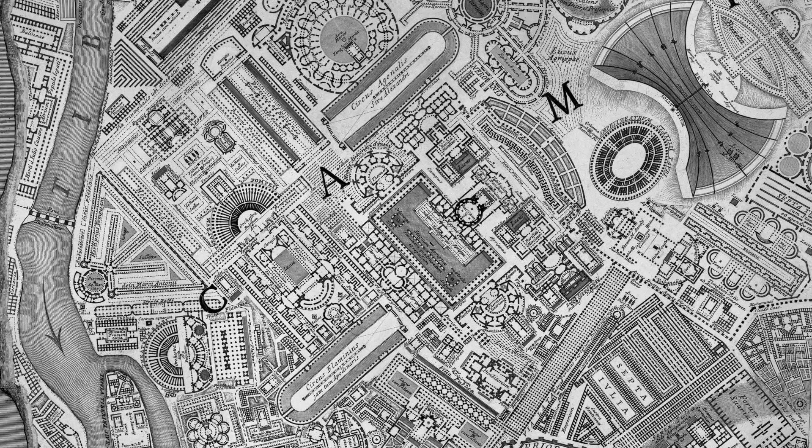The theme of this video is the structural grid, an omnipresent element in 20th century architecture that became synonymous with structure. As on other occasions on this channel, there is no intention to exhaust the subject, which would be impossible anyway. The idea is to draw attention to some aspects of the topic that may deserve deeper reflection.

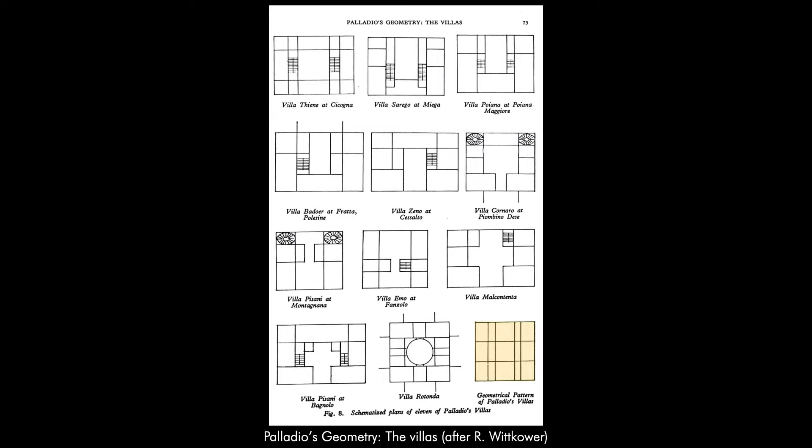The grid can already be found in various forms in previous centuries. Two-dimensional grids are present in Palladio's villas, as Wittkower showed us, on the facades of Renaissance palaces, and as the graphic support on which to place architectural elements introduced in Durand's teaching.

These first examples are important here because they illustrate what is not the subject of this video: the two-dimensional grid, a subject already dealt with by other authors.

The central theme here is the structural grid made up of pillars, beams, and slabs, a three-dimensional element that transcends its technical commitment and decisively participates in the expression of architecture.

The interest in this system lies in its potential for formal construction. Grids of this type convey a notion of measurement to buildings, as each module represents a floor, and thus the whole conveys information about the absolute size of the object.

Structural grids have the potential to give unity to a building and serve as a reference for three-dimensional explorations of facade elements, as in the cases of Terragni and Kahn, which we will see ahead.

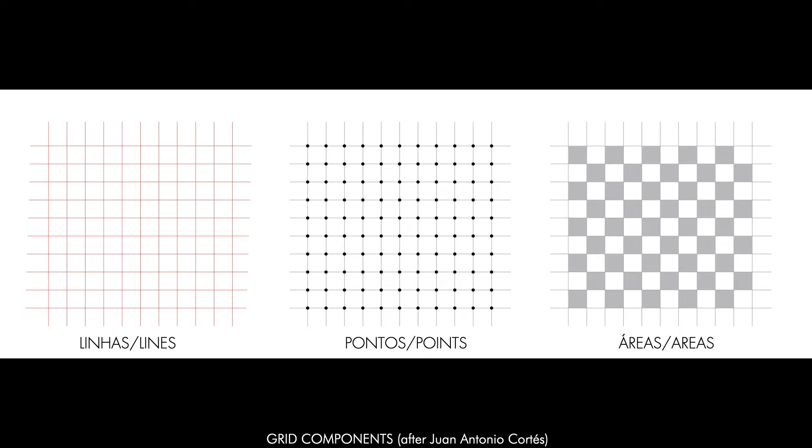When lines predominate, we are generally faced with large-scale projects, in which lines become corridors, buildings, or even streets. There are well-known historical examples, such as Berlin's Free University by Candilis, Josic, and Woods, or the unbuilt Venice Hospital project by Le Corbusier.

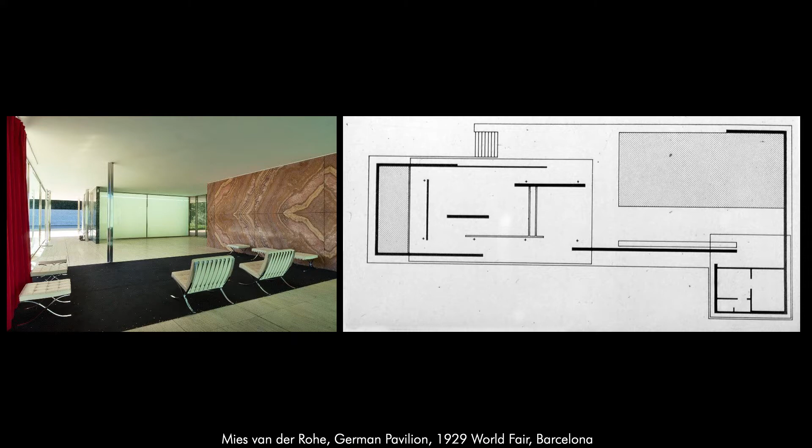The predominance of the grid dots, the columns, is very clear in the free plans of Le Corbusier and in what Mies van der Rohe produced before moving to the United States.

However, considering the grid in the sense I want to discuss here, in the work of these two architects it is incomplete, as only two of its elements are visible, the pillars and the slabs. In other words, the grid is flat, having only material entity as a resistant structure.

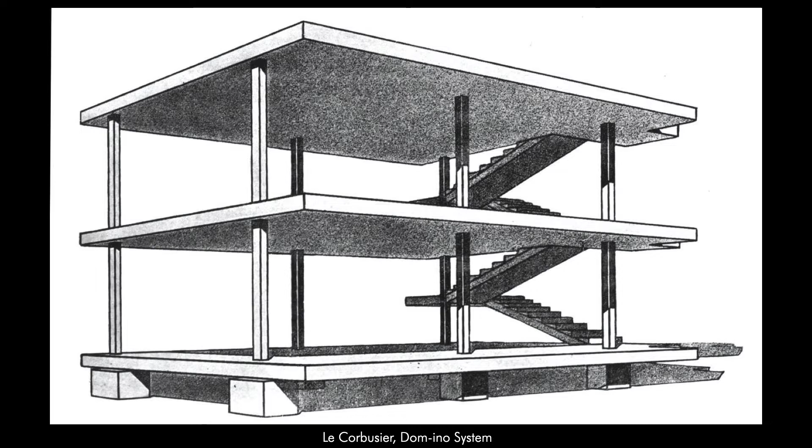Le Corbusier himself, inventor of the Dom-ino system, did not usually show the structural grid in its entirety, preferring to structure space from the plane.

When our focus is on the areas of the grid, it becomes a set of repetitive and self-contained spatial units. That is, the reverse of the free plan.

The grid is used selectively, and its homogeneity can be altered by the eventual displacement of some of the units. The grid here is a starting point that does not play a decisive role in the final appearance of the object. However, it was a fundamental support for Kahn to recreate the building as a discontinuous set of spaces.

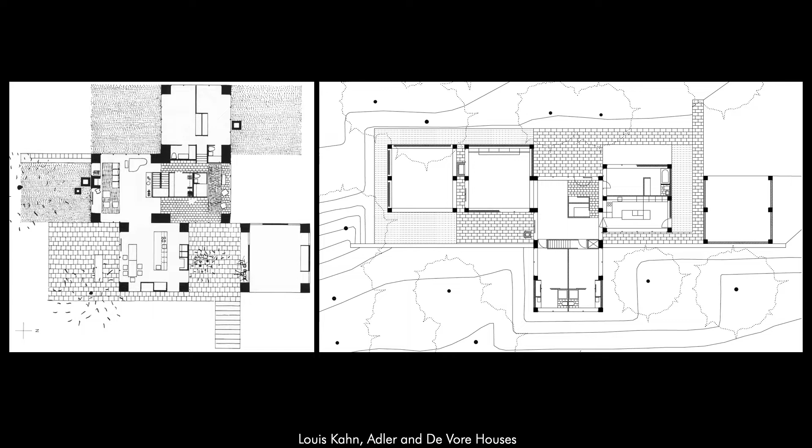The transition from the system of load-bearing walls to the reticular system opened a new period in the history of construction, as previous architecture used the wall as the basis for its construction system.

In the beginning, the appearance of this kind of architecture was not congruent with the construction, as elements of historical origin were applied to the metallic structure.

In Holabird and Roche's architecture, the resistant structure begins to appear unmediated, although the past persists at the base and at the top.

Albert Kahn, an architect known for the many industrial buildings he built for the nascent American automobile industry, converted the grid structure into apparent form, getting rid of all circumstantial ornament. As far as is known, it is in his work that the structural grid is used for the first time in this way.

Perret was one of the first to separate structure and walls from the point of view of resistance. But with regard to its position in space, the structure remained linked to the spatial division, at least in residential architecture.

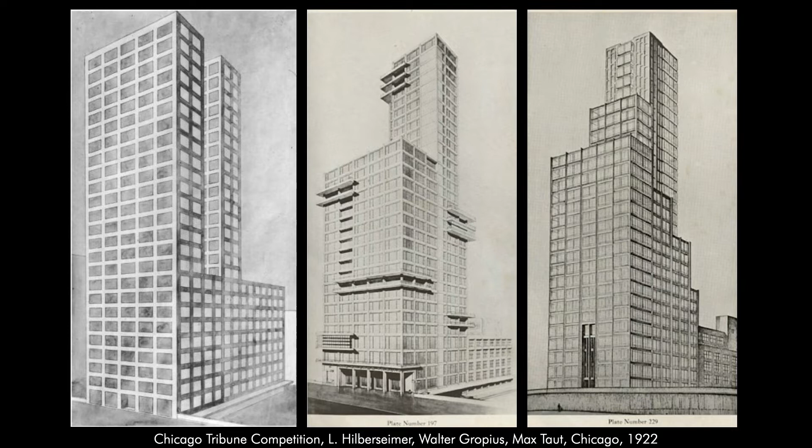In the famous competition for the headquarters of the Chicago Tribune newspaper, the grid as an expressive element made its appearance by the hand of three European architects: Ludwig Hilberseimer, Walter Gropius, and Max Taut.

In these projects, one of the most positive characteristics of the three-dimensional grid begins to reveal itself, that of serving as a modulation and measurement system. Note that all additions and subtractions performed in the three projects use entire units.

In addition, the grid makes it possible to convert, without mediation, construction elements into architecture, as well as to establish a formal order that emphasizes the height of the floors and the position of the slabs.

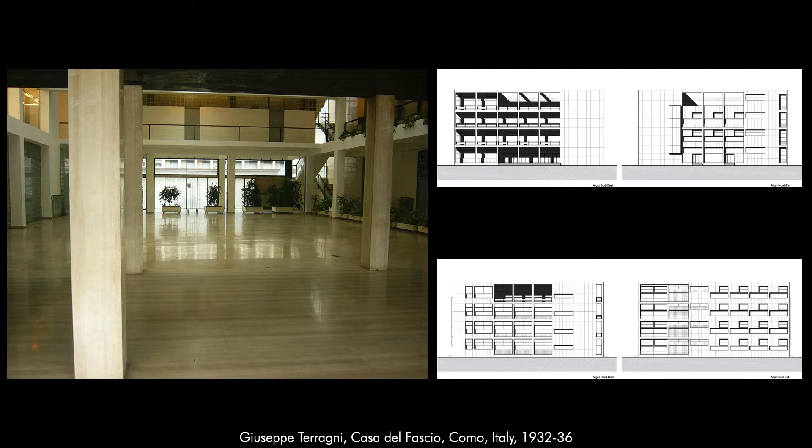It is in the Italian architecture of the interwar period that one finds a decisive development of the structural grid as an expressive element. Architects such as Terragni, Lingeri, Cattaneo, and Gardella used it as a fundamental element in a series of interesting projects. In this and the next two projects, the grid structure is the support of the form and its main element. Interior and exterior are solved with analogous solutions.

As pillars and beams have similar dimensions, the grid loses much of the reference to its resistant role and plays an equally important role in the visual structure of the buildings.

In the project for a Congress Hall in Rome, Terragni proposes one of the first structural grids in which the distance between columns is not always the same, alternating narrow modules with wide ones.

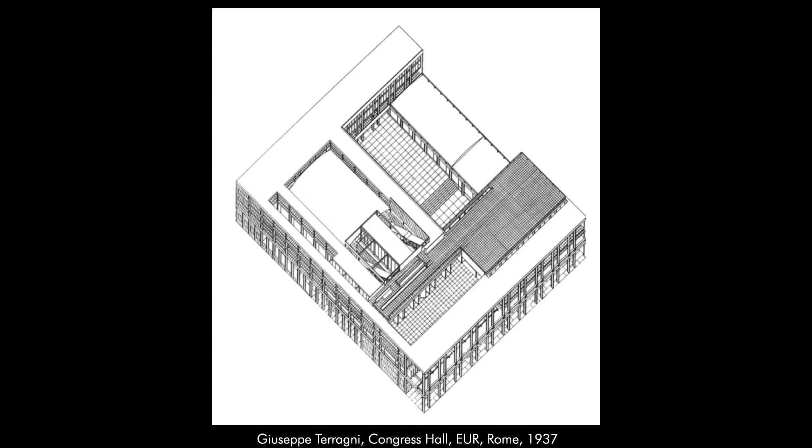In the competition for a tower in an important square in Milan, Ignazio Gardella uses the grid to expand the scale of the object and make it more compatible with the public space being proposed.

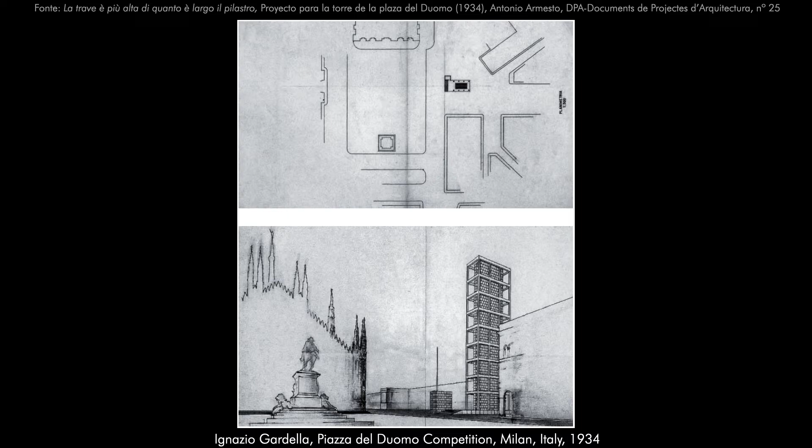After a few decades in which it aroused little interest, the structural grid reappears with full force in Louis Kahn's work, being the main reference both outside and inside the Yale Center for British Art. Its formal system is based on the relationship between the grid and its filling: metallic panels on the facades and oak panels on the interior.

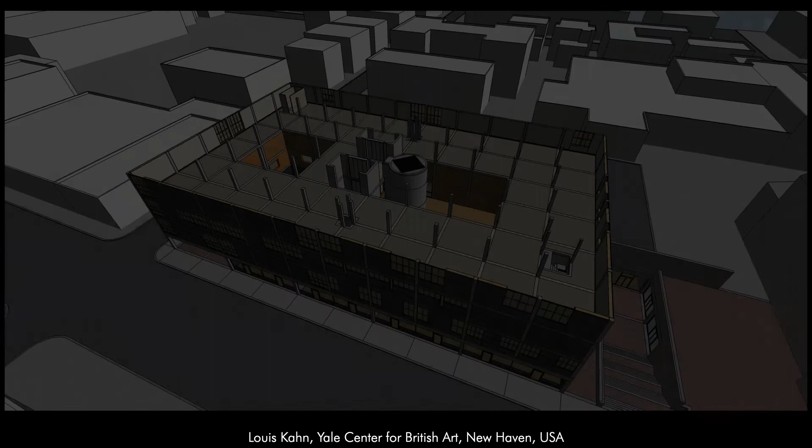When the grid is applied without variations to large extensions of facade, there is a risk of generating bland buildings without much visual interest, as is the case of Chipperfield's City of Justice in Barcelona.

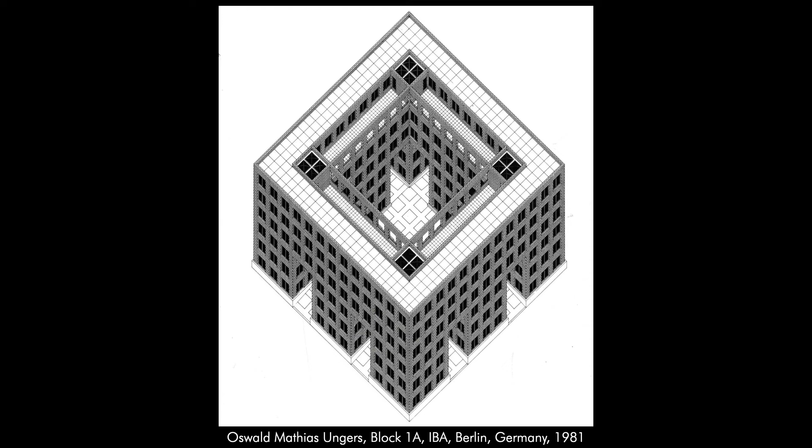The structural grid is often thought to be best suited for buildings with a prismatic shape that approaches the cube, such as Kahn's at Yale and this one by O.M. Ungers.

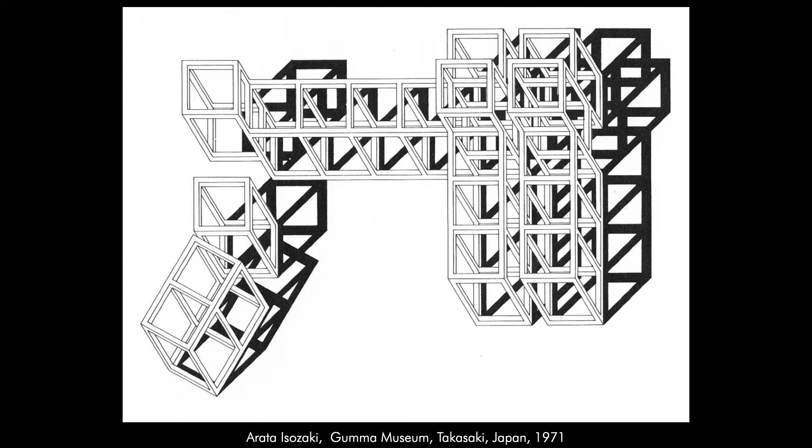But, as in the towers proposed for the Chicago Tribune in 1922, in the 1970s, three-dimensional grids began to appear in a series of buildings composed of additive and asymmetrical forms, as well as in subtractive compositions in which the modules of the grid become outdoor or multi-height spaces.

In Isozaki's design, shown here, the grid is limited to a single floor for most of its asymmetrical arrangement.

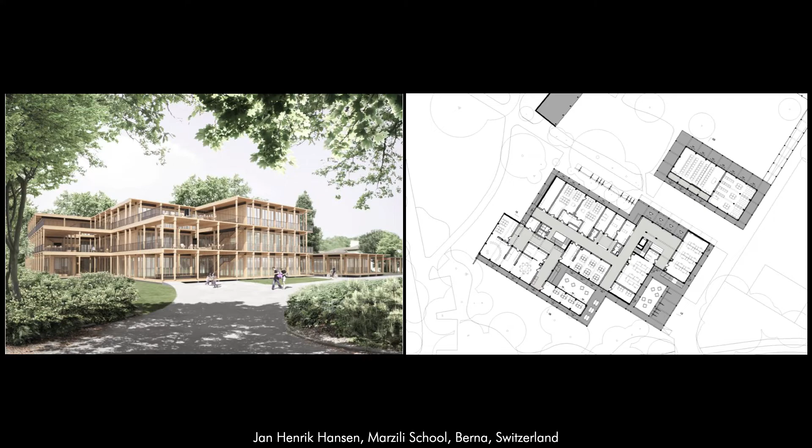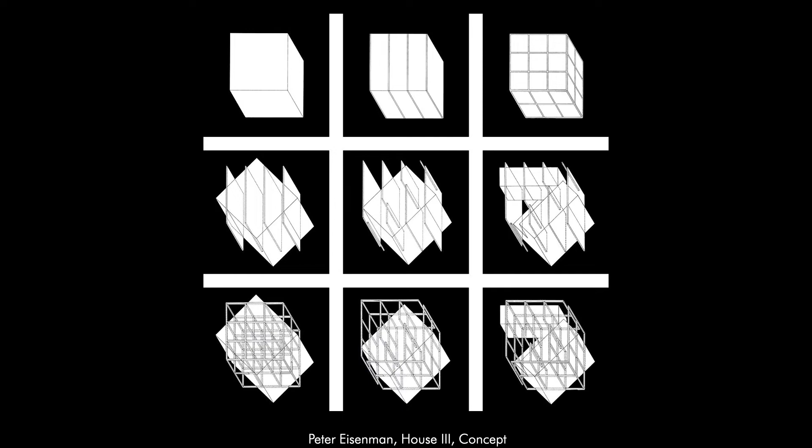A contemporary example of the use of a structural grid that does not define the contours of an elementary solid. In Eisenman and Graves's projects, the grid is the reference, a stabilizing element that allows for a series of formal manipulations around it.

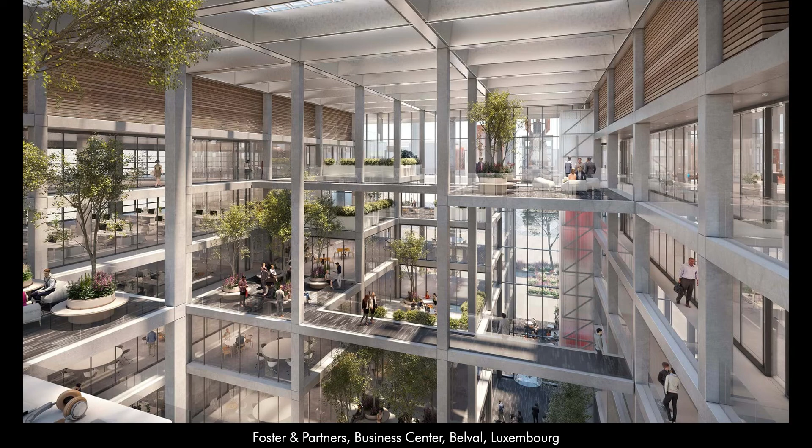The use of the structural grid as an expressive element reaches its maximum interest when it influences the exterior and the interior with equal intensity, as in another example by Max Dudler, in whose production it is difficult to find a project that is not organized by way of a grid. Something similar, albeit less rigorous, happens in this project by Foster and Partners.

Perhaps the most interesting topic of this brief discussion is the creative potential that the three-dimensional grid offers, as a visual reference and constant material for formal operations, which will be all the more relevant as they are related to the uses of each building.

In the festival building, Ando does not treat all units as interior spaces. Several units act as exterior spaces and others are combined inside as vertical voids. On the other hand, the architect also ventures outside the cube defined by the grid to accommodate vertical circulation.

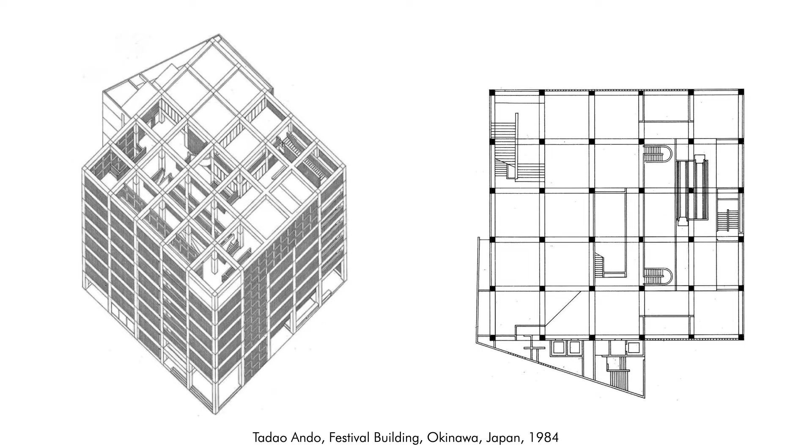A contemporary version of the same strategy, the prismatic exterior shape is clearly identifiable by the presence of the grid elements, even though part of the cubic units in each pavement are open or empty spaces.

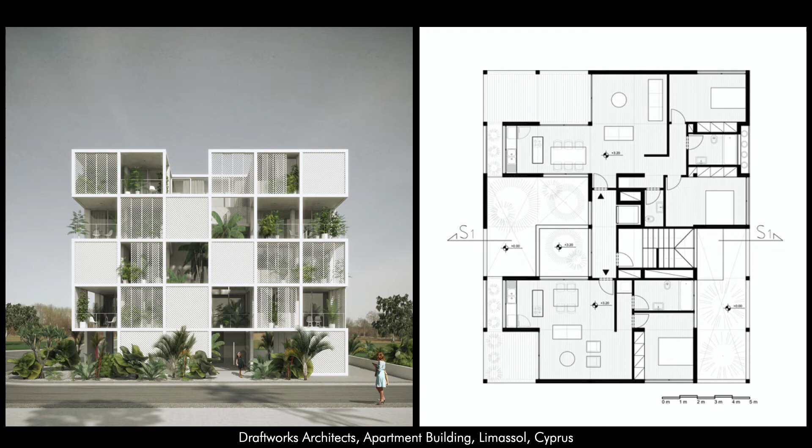Here, a multi-purpose building with a rectangular plan, the authors also resort to cantilevers. Some outer pillars are removed, but the grid remains identifiable.

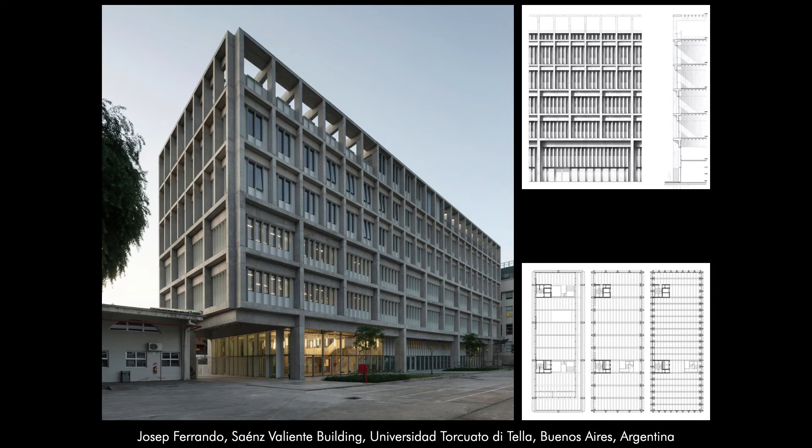The last two projects to be discussed present solutions that introduce complexity to the theme of the three-dimensional grid, without compromising in any way the uses that the two buildings should facilitate.

In the case of this university building, we are faced with an unconventional grid, whose depth is just one unit, with pillars on the edges of the plan, configuring an interior space of total flexibility.

The main interest of this project lies in its facades, in which the variable distance between the pillars alters the grain of the building's surface.

On the ground floor, the distance between pillars is 3 times that of the two immediately above. From the fourth floor upwards, the distance between pillars is half of the ones below, which represents 1/6 of the distance between pillars on the ground floor plan.

In the last stage of this transformation of the facade, the pillars go beyond the last floor and, in combination with the cross beams, generate an exterior room that crowns the volume.

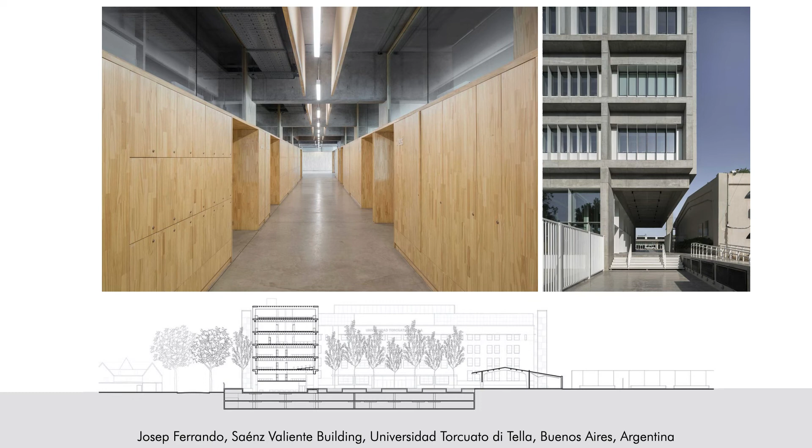Both ends of the building are cantilevered to provide more permeability to the rectangular courtyard in which it is located. What could have been a rectangular block without much interest has become a very interesting object from a visual point of view, in addition to satisfying what is requested from a functional point of view.

The connoisseur of architecture identifies the relationship of several of its formal episodes to modern precedents, but the way in which they were absorbed by this project qualifies it as exemplary.

The last project is an atypical case, in the sense that the structural grid constitutes the building in the most radical way possible, but is partially covered by a translucent cover that is not parallel to its facades.

The competition drawings revealed more of the grid than what appears in the built object, a prismatic volume defined by a homogeneous grid of 8 by 8 by 26 cubic units.

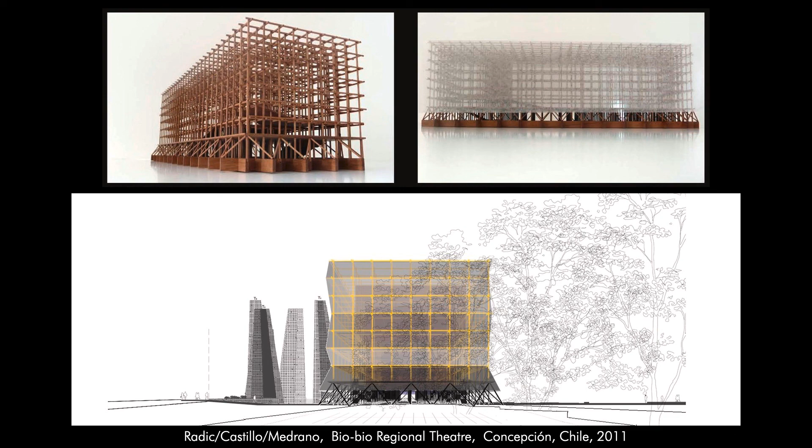This volume undergoes some excavations, so to speak, to accommodate the large spaces necessary for a theater, which remain hidden from inside the grid.

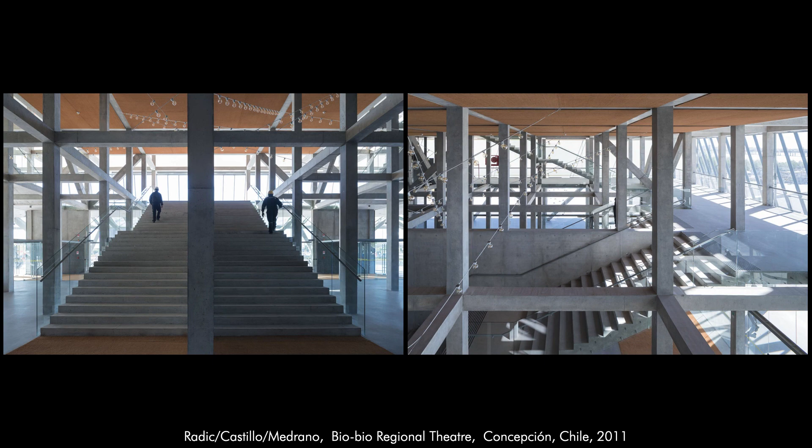From the outside, it is difficult to perceive how much the grid is predominant in the interior perception of this building. To circulate inside this is to walk all the time inside the grid, one of the most characteristic elements of architecture in the 20th and early 21st centuries.